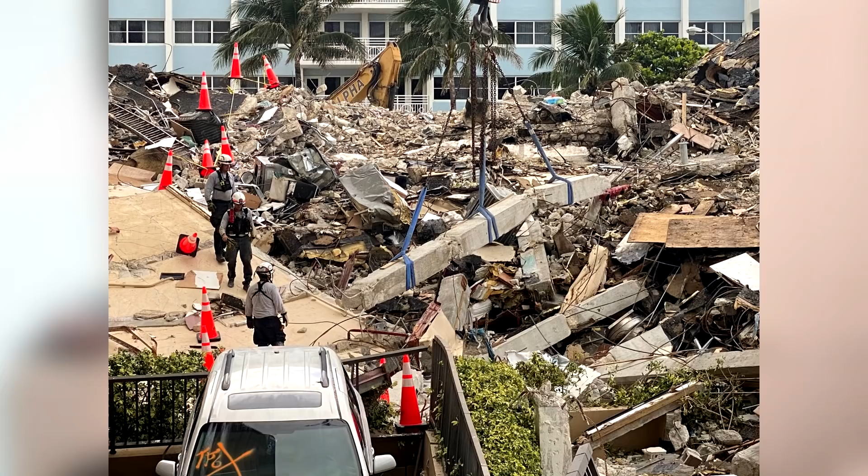Hey everybody, Jeff here, and in this video we're continuing our series on the Miami condo collapse at Surfside, the Champlain Towers South. Today we're going to analyze that pool deck and come up with some ideas of what could have possibly made it collapse. We also want to talk about those palm trees in more detail, since everybody's been asking about what role they may or may not have had. We're also going to examine the strength of the concrete and look at some photos taken in the past week now that the site has been cleared, and come to some conclusions based on those.

I want to show you something I read a few weeks ago that was pretty startling. I was reading one of our engineering periodicals, ENR, Engineering News Record, and I'll put a link to this article in the video description below. This was on July 5th, the day after the Champlain Tower South building was imploded by the contractors, CDI, to remove the remaining part of the building because it was too risky.

You remember they did it on the 4th of July. They interviewed the president of that company, Mark Loizeaux, and he gave some observations that were pretty shocking. In one area of the building that was still standing, let me show you a bit of what the article said. It mentioned that in one area, for example, the columns measured 24 inches in diameter, while the plans showed them to be 16 inches in diameter.

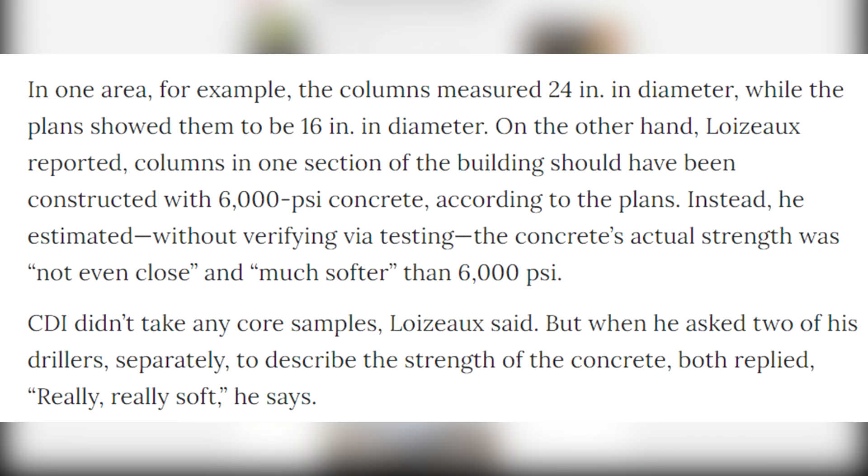On the other hand, Loizeaux reported columns in one section of the building should have been constructed with 6,000 psi concrete according to the plans. Instead, he estimated, without verifying via testing or core samples, that the concrete's actual strength was not even close and much softer than 6,000 psi. Remember, this was without core samples or real scientific data, but these guys are PE engineers who drill this stuff day in and day out. They know what they're drilling into, and if they say it's less than 6,000 psi, you've got to believe them.

Now the question is, was it like that in the part of the building that collapsed? See how each time you get more testimony, more pictures, more evidence, it just opens up more questions.

On all of our videos every day, hundreds of you are asking me about all of those security camera videos that there must be. Believe me, folks, I have tried putting in a request to the Miami-Dade Police Department for videos, and we haven't heard back from them yet. As you know, this is an active criminal investigation, so we are not likely to get anything anytime soon.

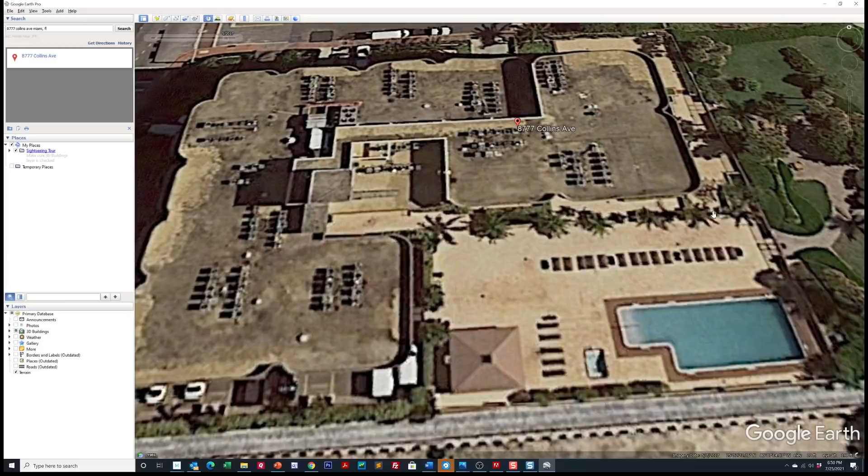Okay, so now looking once again at Google Earth, I want to see when these palm trees were removed from the pool deck and why. I think we have a pretty good clue here. The imagery date is May 7th, 2017, and you can see the palm trees are still here. Now if I go up to December of 2017, a few months later, look what happens. Poof. They're gone.

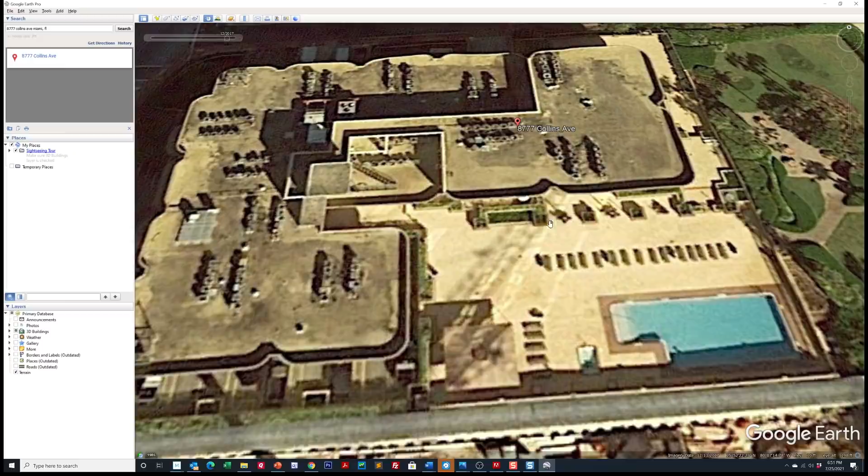So what happened between May and December of 2017? Well, Hurricane Irma happened. A couple of questions we have here: did Hurricane Irma topple any of these palm trees, and were they then removed? In which case they may or may not have caused damage to the deck when falling, because these trees can weigh anywhere from 100 to a couple hundred pounds per foot of length. This position right here, ironically the one that I think started it all, this tree was the tallest of the bunch, probably around 20 feet tall.

So as we look here where all of these palm trees were removed, we have a couple of questions to ask ourselves. How did they come down? Were they toppled by Hurricane Irma? Or did somebody climb up to the top and cut 2-foot sections off at a time like they normally do with palm trees when they cut them down?

The only problem is if you cut off a 2-foot section, you're looking at 400 pounds of palm tree at a time dropping down to the deck. Otherwise, how else are they going to get it down? And that could be devastating to the deck too.

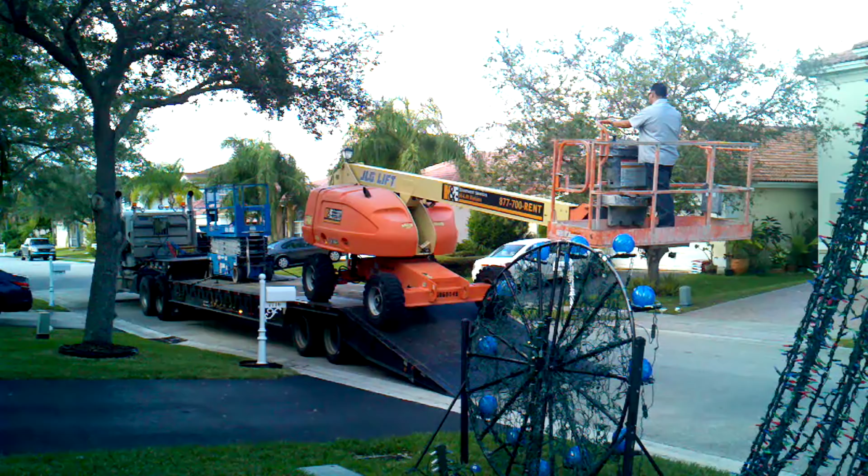Who knows? Or another scenario is maybe they came in here with some kind of forklift or one of those JLG lifts. I used to rent one of these when I did my Christmas tree display, a big huge Christmas light display at our house, and we always rented a cherry picker. But what if you drove one of these across the deck here and then lifted up these palm trees and then drove it back out again? What would happen there? Could that damage the deck?

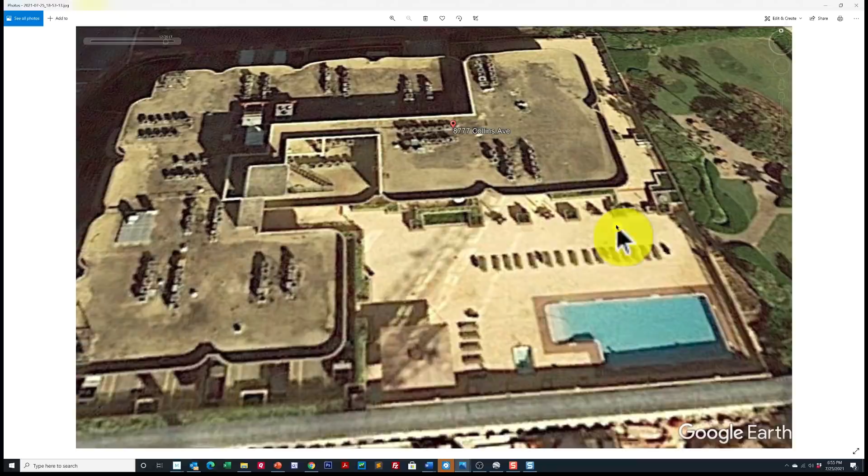What if it was a scissor lift? Those could be heavy enough to damage already weakened concrete and cause a whole web of cracks and stuff that you might not even see underneath.

Okay, so here's a rudimentary idea. Let's say you come driving across the pool deck with a cherry picker, and you're going to remove all of these palm trees. So not only do you have the weight of this heavy equipment, by the time you add a palm tree it's carrying off and possibly laying it down, that's a lot of weight concentrated under one small area. Then we have to ask: is the pool deck designed to handle that sort of weight, or is it designed to only handle pedestrian weight?

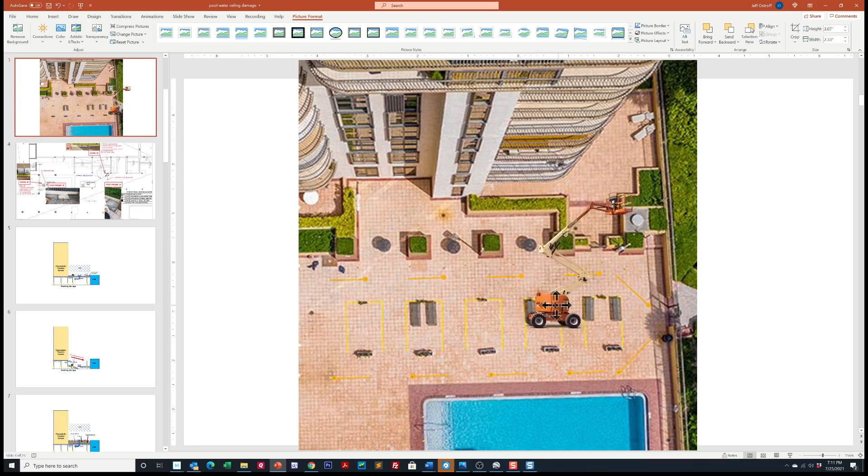So you see, these are the kinds of things I'm wondering. I mean, those palm trees had to have been removed somehow. We just don't know how. Here, I'll show it from another angle, looking down at the pool. This is about approximately the correct size.

So they would probably come right up here with the boom lift. This one's actually an articulating boom lift. You'd come right up to the palm trees, and it could probably grasp them. Not sure if it has enough strength to hold the full weight of it. Just not sure. But you can see what you'd be doing.

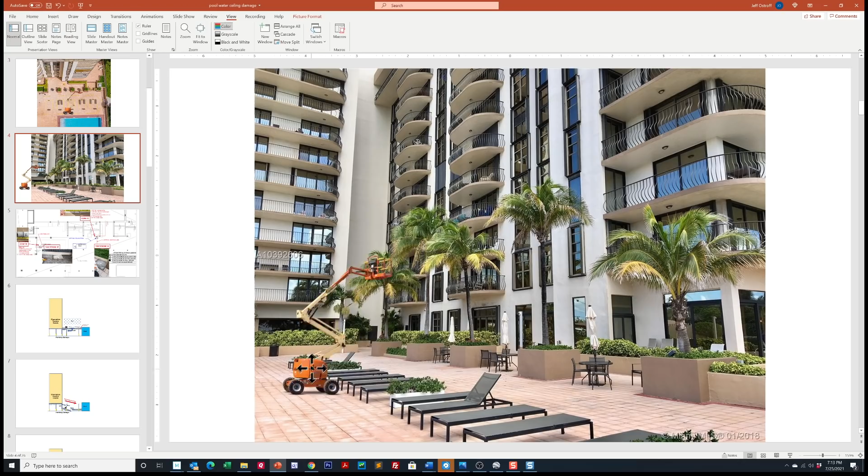You'd be driving this thing all up and down the pool deck. And where you've already got potentially compromised concrete from botched repairs in previous years, this could be creating a whole spider web of cracks and weakening that concrete even further. So I hope this illustration helps you understand what is likely the scenario that went on there.

So this is one hypothesis that I came up with: supposing this thing just created a whole bunch of spider web cracks along the pool deck that really weakened it. And then maybe that combined with other effects here. Remember, there's no one smoking gun.

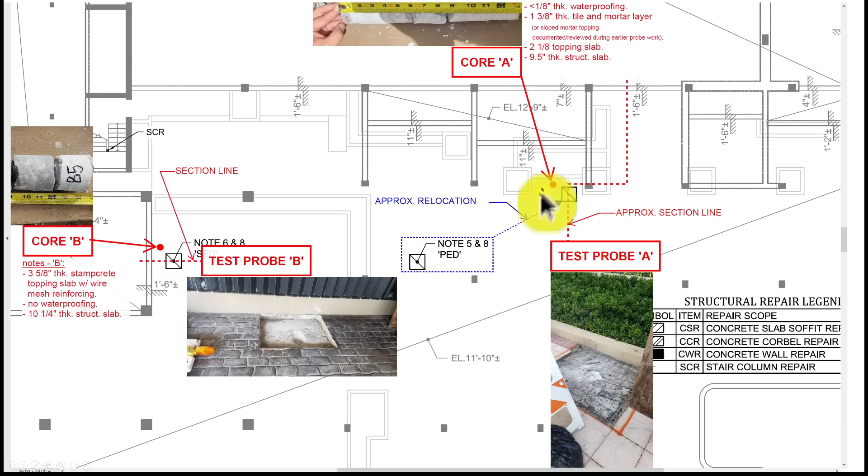I think what we're going to find is smoking guns, not one thing in general. You have weakened concrete from previous repairs that was botched. You have this exploration site that was carved out in the summer of 2020 that appears to have never been repaired properly. And then you have potentially latent cracks that we can't see. So just like any engineer would have walked into that garage and said there's no way this building's coming down anytime soon. Now, a lot of the damage and flooding we saw in there is alarming and should be repaired, but there's no one smoking gun, folks. I think we're going to see a combination of several different factors here.

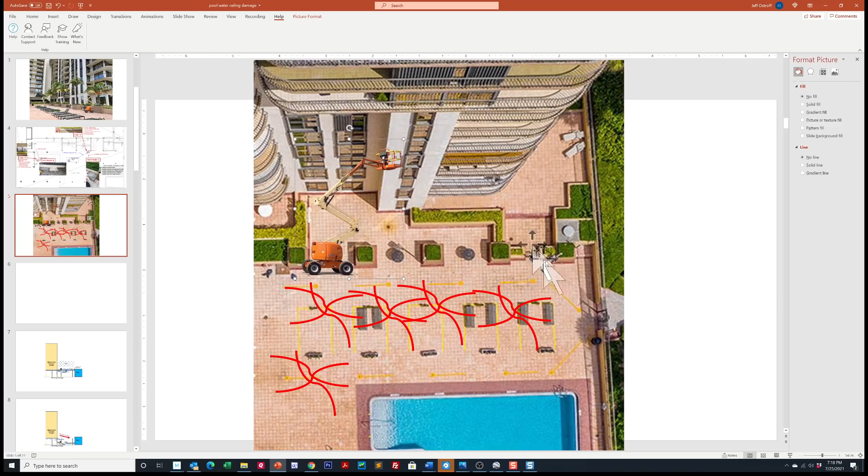And remember, this is all just speculation. But let me show you something that is not speculation. Okay, so here's where we get our proof.

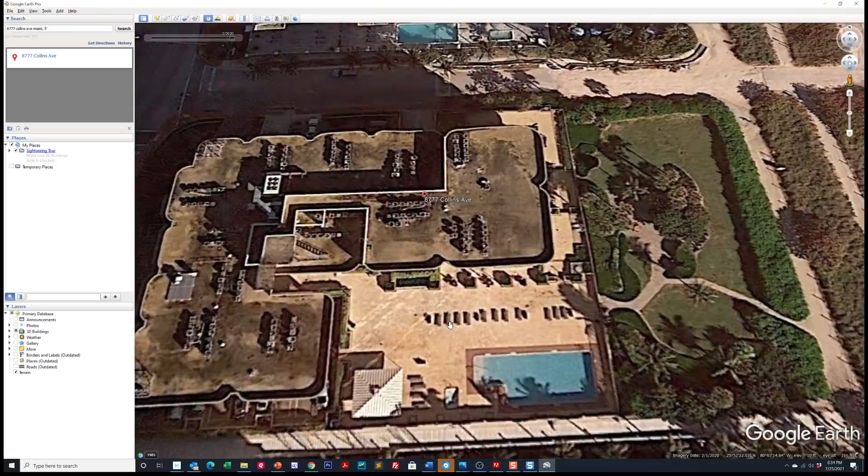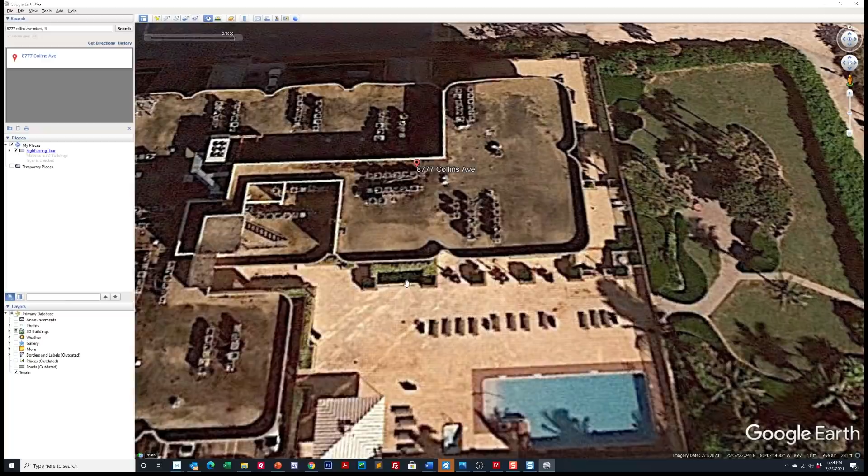So here we're looking at the Google Earth photo of the pool deck area. And we can see that this particular one here was shot in February, right here, February 1st of 2020. And you can see they have not dug in that little 3-foot by 3-foot area yet. You see that? Let's go look at some other dates. March, for some reason they're not giving us a clear photo.

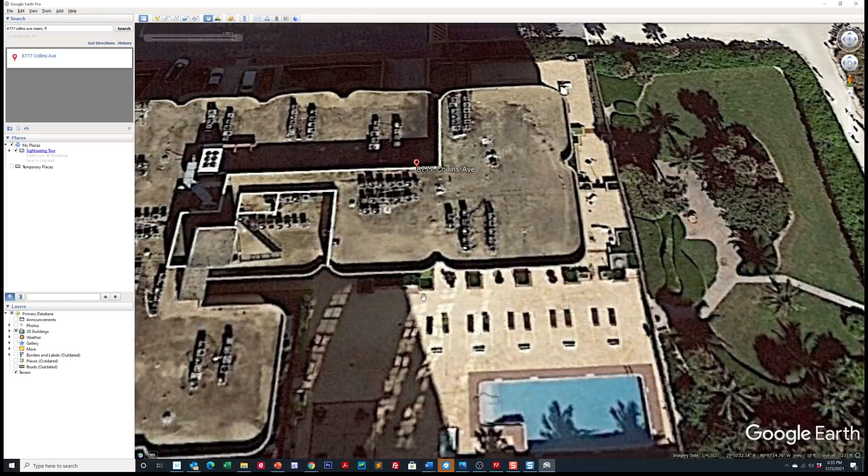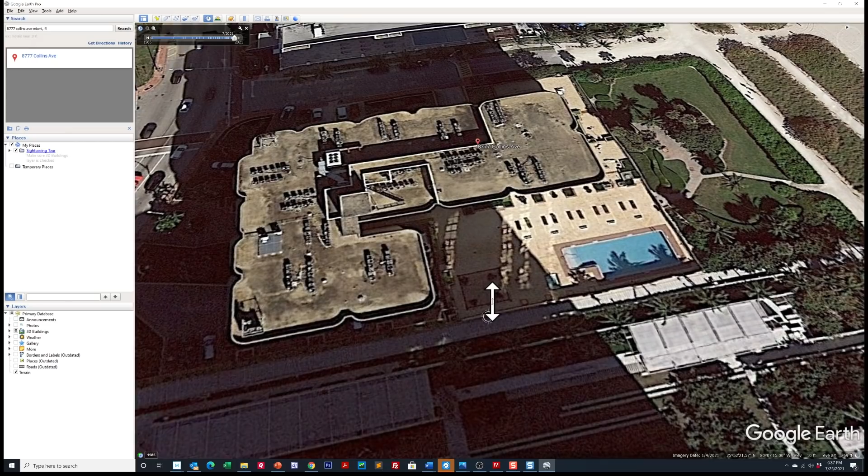But now you can see we've skipped ahead to January 4th, 2021. See right down here, there's the date. But look right there, there's the area, and it still looks like it's uncovered. It doesn't look like it's been patched. Yeah, because there you can see on January 4th as we zoom in closer and closer, trying different angles here, but you can definitely see that the contractor did not patch that spot up.

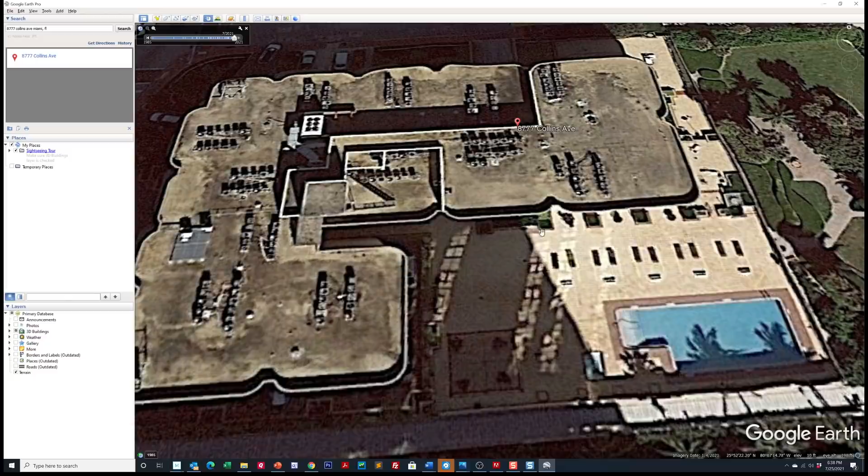It looks to me like we're seeing straight through to the bottom of the area where they dug in. And remember, this is that planter, folks, where that column M10 is located, right underneath it. This is the one we're talking about. And remember, it's the first one south of the building. The building ends right here, and this is where we think all of the collapse initially started, in the pool deck, as we saw in that now famous tourist video where we were looking down the ramp and we could see that giant pile of rubble right here.

Now, let me answer another question that we get quite a few of. We've pointed out to you before that a lot of the columns in the garage are different sizes. Some are 16 by 16 and some are 12 by 16. And people are asking me, why would it be that small if it's supposed to support a building? Well, you're sort of incorrect in making a statement like that.

All of the columns that we pointed out here that are directly underneath and supporting the building itself are typically 16 by 16. It's all of these other ones that, once you get out from underneath the building - see, a lot of people forget this pool deck goes over the entire parking garage here - and then the rest of it is underneath the building. But once you clear the border of the building, shown here with this gold square, all of these can be 12 by 16 because they're not holding up any load. They're just basically holding up the pool deck. Now, they all did that punching shear in this yellow area, and that's what we're trying to get to the bottom of.

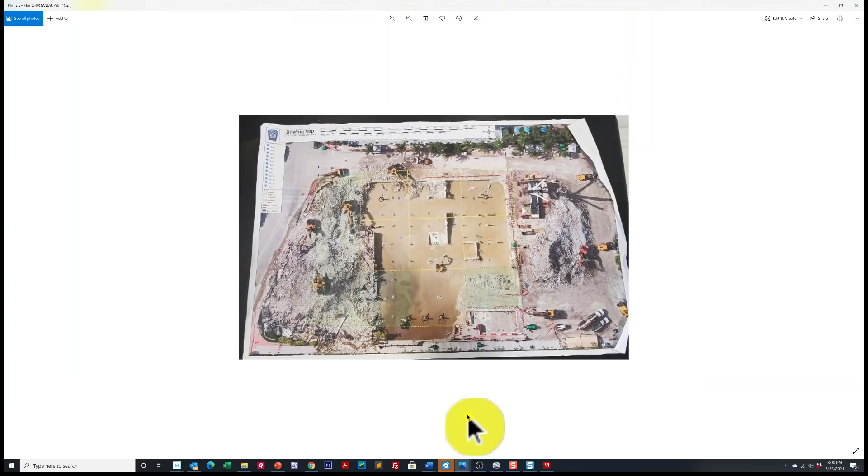Okay, so let's get an update now on what they've been doing here on the property. So they've pretty much got everything cleared by now. All of this rubble over here from when they imploded the standing part of the building to get it out of the way - everything's been cleared now, and the entire garage deck now looks like a hockey rink with walls around it. Okay, so most of this stuff is gone. Even these longer columns are now just short stubs. They've all been cut like just above the floor.

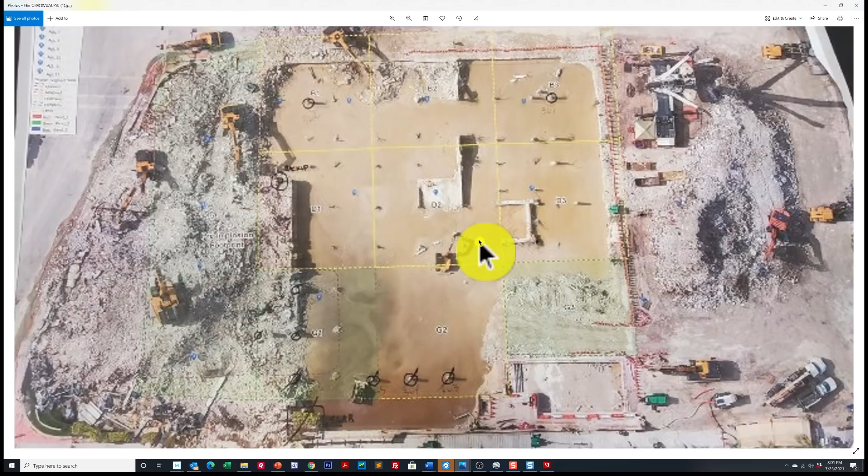So what we're left with is here's our ramp coming down right here. As we zoom into it a little bit more, let me show you something here. When you come down to the bottom of the ramp and turn around, you're in space number 14 right here. So here's the column for 14. Let's go see what that is. See, here's what I was talking about.

Coming down the ramp, you turn the corner, and you're in space 14. So the one opposite 14 should be column number 27, for space 27 there. And then the one beyond it is one of these two that we think caused the failure. Remember, these two are outside the border of the building. So here's number 14, the next one right here would be number 27. And then this is the one between space 27 and 28, which is M10. This is the one that we think might have failed. The other one, I don't even see it over here at this point.

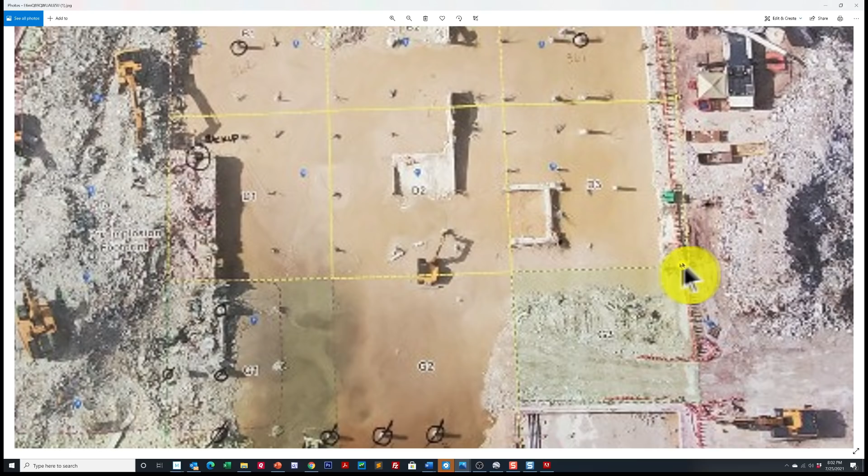So we think the border of the building is, let me zoom out a bit and adjust this, okay. Yeah, so we think the border of the building is probably right along this route here. See? And here's the shear wall, and the elevators and the stairs are in this area, but this is the shear wall. Remember, we always count off 1, 2, 3, 4, 5 columns.

Now we don't really know what this is. I suspect this might be the columns with the beam, and it toppled over. That is my guess right here. Because this is not like a room or a wall inside the garage, there's nothing in there. If you go look at the basic plans, and we've shown you this many times, see, there's nothing, because this is supposed to be the main drag where you drive through in the garage right in here. And that little thing is sitting right here. So this is what I think we're looking at right here.

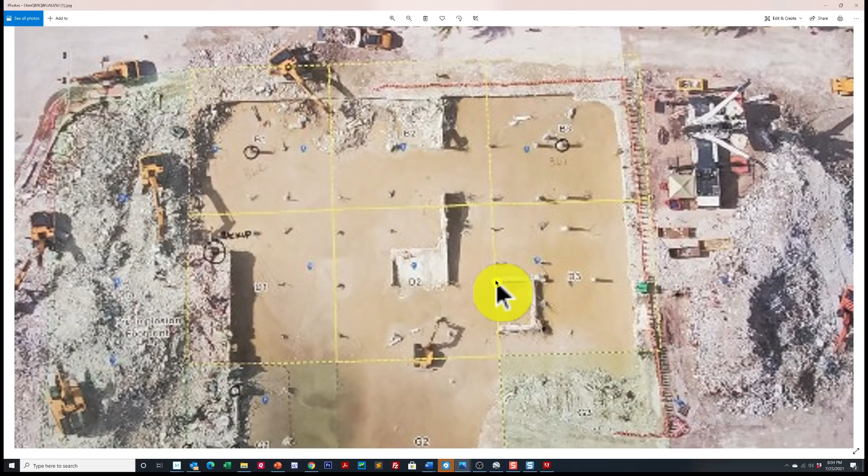The columns on the other side of 27. So I'm thinking that this is 15 and maybe 29. Let's go see. Yeah, 15 here. Oh, I'm sorry, 26. So it's 15 and 26. I believe it is these two that toppled over somewhere right around here.

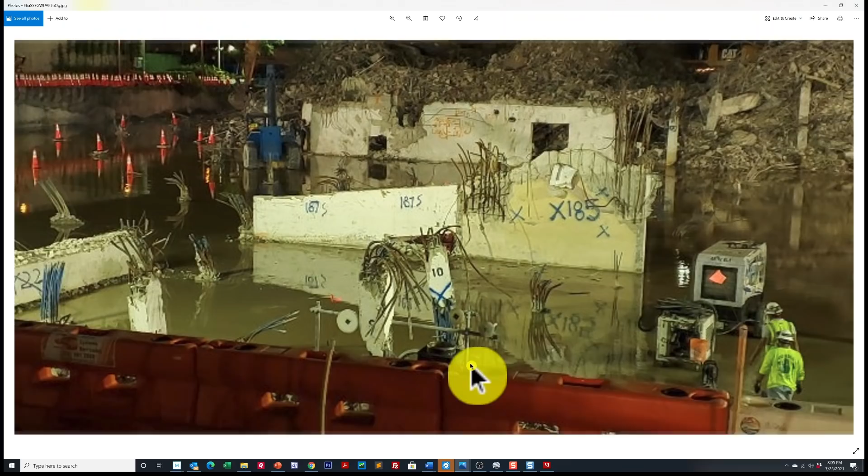Okay, so here's another good shot here. And what we're doing now is we're on the east side from the ocean right here, facing west. So Collins Ave is over here. This is the back side, in the garage, the vestibule. And right here, we're looking at the ramp, the remnants of the ramp coming down. This is the post for space number 14. Here's our other friend over here, the post for space number 27.

So you can see everything in this area. It didn't look like there was any sinkholes or anything. We've already ruled sinkholes out the minute we saw the first images showing the live bottom of the garage, about 2 weeks ago. So I'll show you which direction we were looking from. We were looking towards this way, see? And we were pointing out the vestibule and the elevators and everything, and the ramp. And we were pointing out 14 and 27 again, like that's where we always try to orient ourselves.

All right, so now here you can see I've marked where we think the building was, right there. And then here's our 1, 2, 3, 4, 5 columns that initially fell. This parking space 27 is one of them. And remember, this is directly below Sara Nir's condo, the one where the family escaped and notified the security guard to call 911. So they were right directly above this, that's how they heard the noise. This piece of equipment right here is sitting directly where the debris field was that we saw in the tourist video. And then this is our column that we think may have been the first one to go.

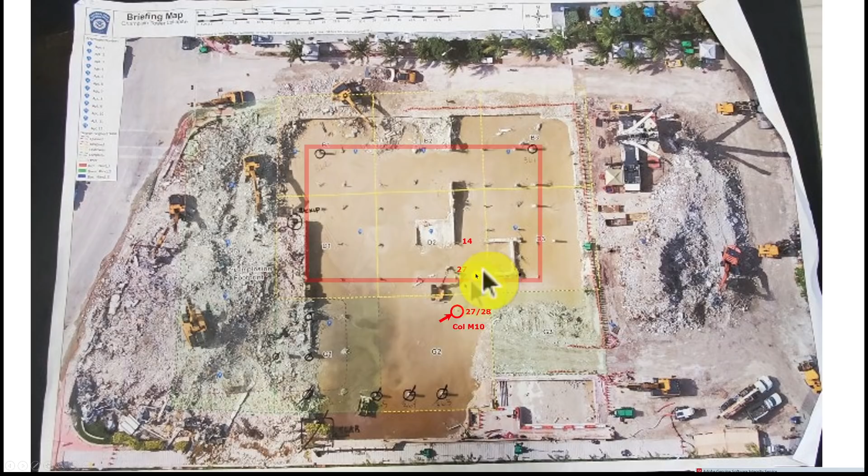That column M10, and then I don't see the one across from it, so it might still be underwater. This is a lot of milky water that had not yet been vacuumed out. We're still trying to get a better overhead picture like this one, where everything is out and it's all nice and white and you can see clearly where most of the columns are.

Okay, now we're looking at a side view of the pool from a great vantage point here, so you can see how rock solid this pool was.

The pool had nothing to do with any of the problems, even though a lot of people keep coming and leaving comments, trolls, saying that I claimed it was the pool. I've never once claimed it was the pool. It had nothing to do with the pool, even though the pool had all of this spalling going on the corbel, and some of it was revealed by the contractor anyway that came in to do exploratory work last year.

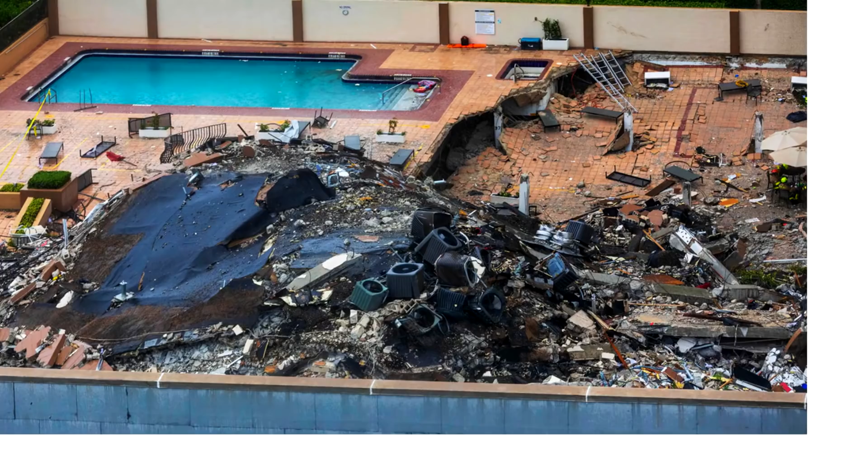This thing held up very nicely. The pool didn't even get any debris in it, if you saw the early photos from the early morning right after. And then here's column 37. It's still fully intact. So this thing was built Ford tough, people.

This wall got blown over by Hurricane Wilma back in 2005, but they tilted it back up or rebuilt it. I imagine they rebuilt it because I think it was broken.

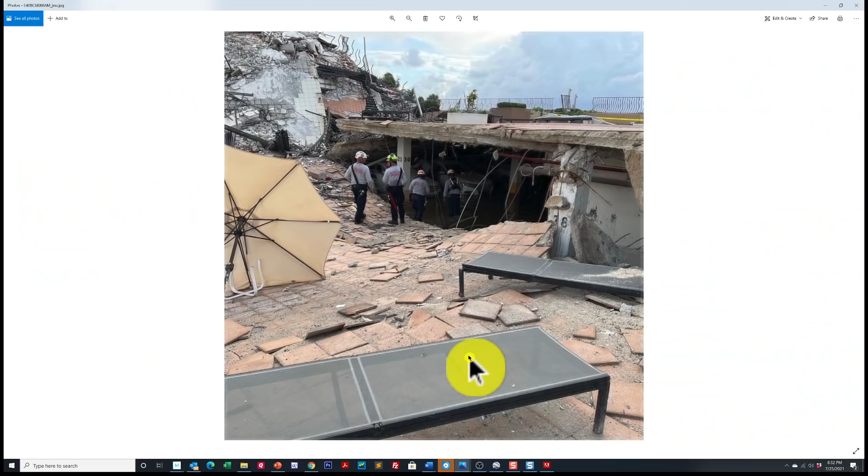Here's another look at the west side of the pool. You can see how nice and thick the slab is there. You can see spaces 29, 30, 38. These columns here survived. This one's looking in pretty rough shape, but man, he held his ground.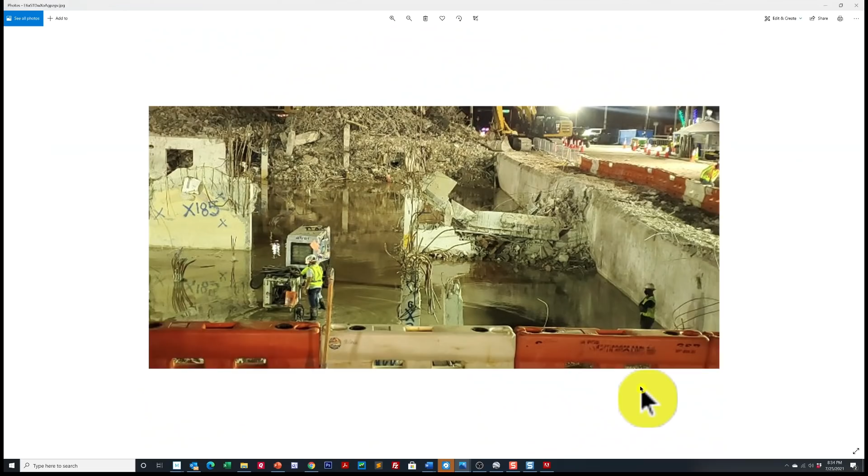Now here's another nighttime shot that was taken last week, and this is facing west, so we're looking at it from the beach side right here. Again, here's the ramp coming down, would have been right here. This was all the support stuff under the ramp, and this was column 1, and you can see column 6 for parking space 6, and then parking space 7 was right here in the corner.

This is where that second garage video that we showed you was filmed, where the lady filmed just the water dripping down off the ceiling and onto, there was an electrical outlet box right here on the wall, and it was all rusty and the water was running down, and her car was parked right here in space number 7.

Let's show you where that is. Remember we showed you column 1 is right here, and then we showed you column 6 right there, and space number 7. So the vantage point from that photo was right here, and the photographer was aimed this way, like this. And that was that space I told you about, where the second lady who shot that video 3 years ago of the water leaking down the wall right here on her car.

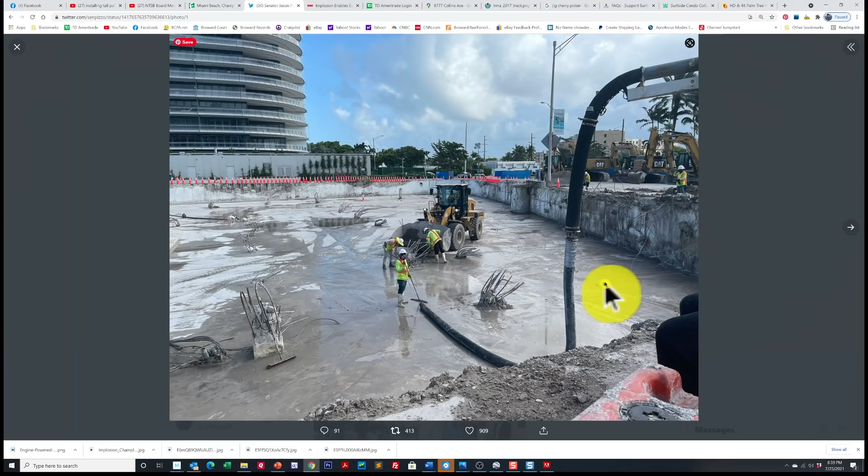And then these here are some pictures that Senator Pizzo tweeted out.

Now here we're on the north side of the property, looking south. So you can see how things are much more further along here now, where it looks more like an ice skating rink. And even the vestibule appears to have been removed. It was right in this area here.

And you can see what they've done with the columns, that they've pretty much ripped them out down to about the floor level. But look how all of the columns were left intact, which pretty much eliminates anybody's claims that it was a sinkhole. I saw so many people - that was probably the number one prediction from most people, was that the sinkhole would be the cause of it.

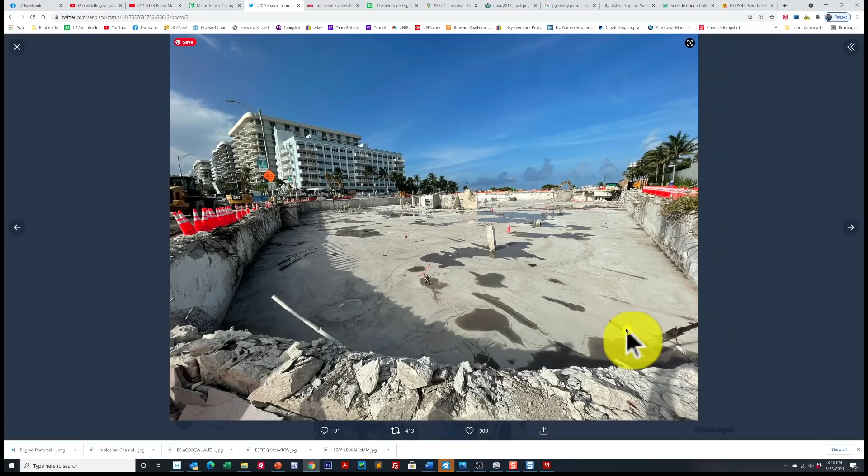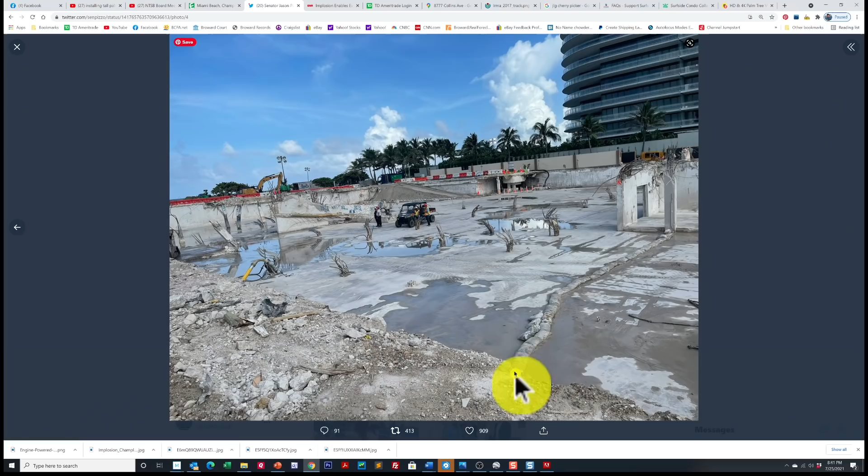So here's another viewpoint. This is looking down towards the pool. So we're on the west side on Collins Avenue, and we're looking here down towards the pool. And here's the vestibule. So there's still a little bit of it left right here. Here's a close-up shot of the vestibule and another shot looking towards the pool.

So again, I still can't get quite a clear enough shot of, I think that's 14 right there. And I don't know if that's 27 or if it's M10, the one that we're looking to get more info on. So it's a little harder. I'd like to be standing right there right now, but you can see how most of the water had dried up. Well, as we collect more evidence and more intel, hey, we'll be sure to let you folks know.